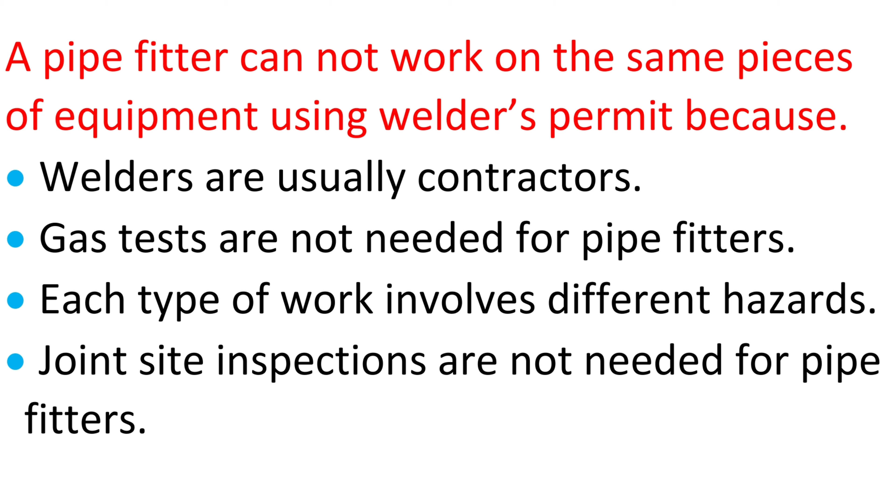Question. If a work permit is not issued during an emergency, what must be done to do the work? The superintendent must approve, all safety precautions must be taken, wear all PPE, and conduct a joint site inspection.

Question. The receiver must stop work if: he cannot find the issuer, the work site becomes unsafe, the issuer leaves the job site, or the designated representative must leave.

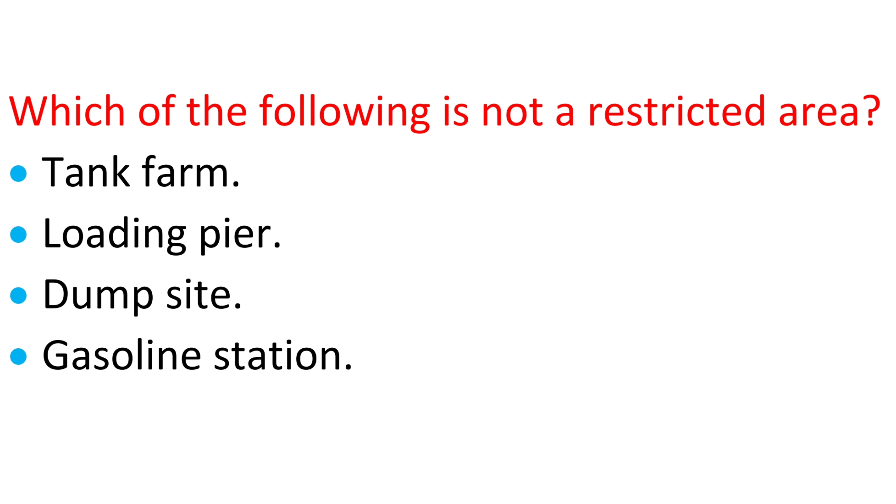Question. Which of the following is not a restricted area? Tank farm, loading pier, dump site, gasoline station.

Question. What do you call an area where work permits are required? Restricted area, sensitive area, controlled area, dangerous area.

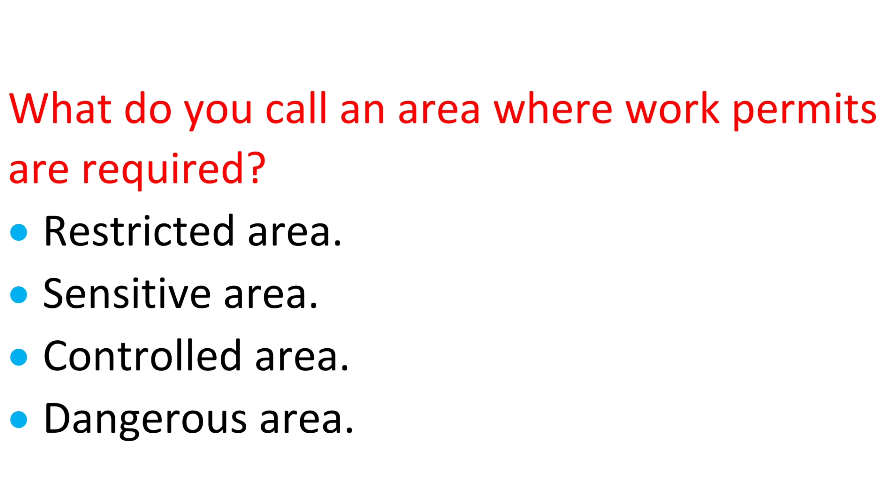Question. Who must sign a permit issued for up to 30 days? Receiver and designated representative, operations and maintenance division heads, designated representative, operations foreman, or issuer and receiver.

Question. Why is the checklist section important to issuer and receiver? It tells them all precautions to take, it makes sure important steps have been taken, it defines the duration and scope of work, or it controls the receiver's break time.

Question. Which work permit requires sewer to be covered within 75 feet? Entry, cold, hot, or release.

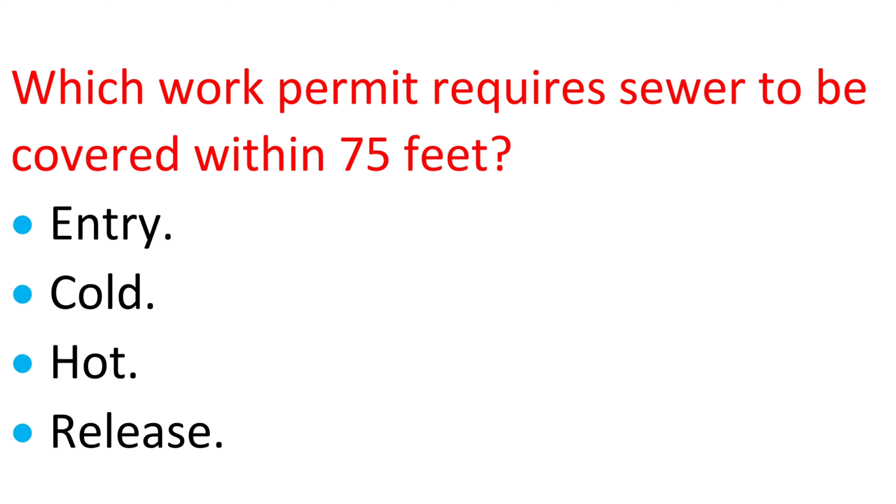Question. Who is responsible for safety at the work site after a permit has been extended? The original issuer and receiver, the person who countersigned the permit, the one who originally did the joint site inspection, or the issuer and receiver who signed the extension.

Question. What happens if work must continue past the time the original permit was to expire? Extend the permit or issue a new one, work can continue until the job is completed, stop work and come back the next day, or keep working but tell the issuer.

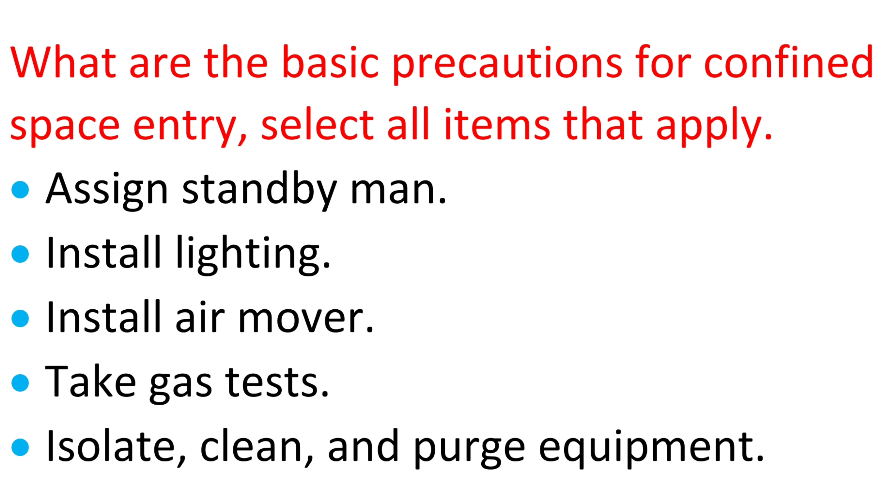Question. What are the basic precautions for confined space entry? Select all items that apply: assign standby man, install lighting, install air mover, take gas tests, isolate, clean, and purge equipment.

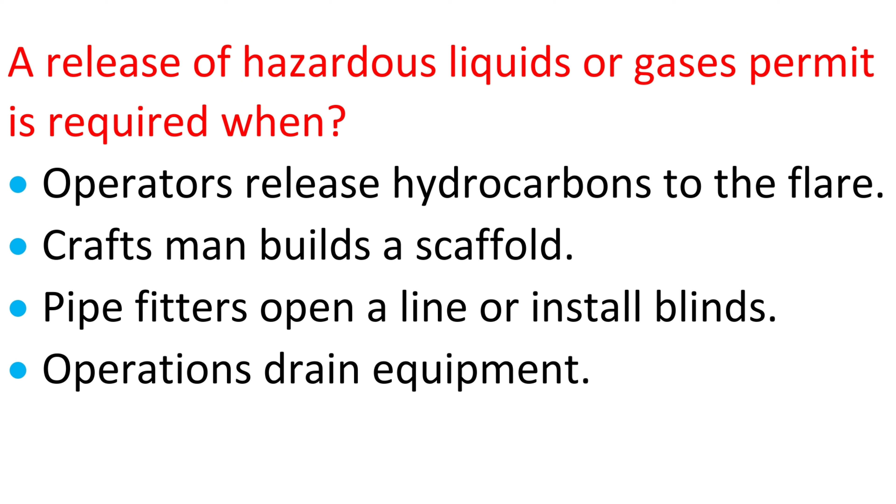Question. A release of hazardous liquids or gases permit is required when: operators release hydrocarbons to the flare, craftsman builds a scaffold, pipe fitters open a line or install blinds, or operations drain equipment.

Question. What hazard would you find when doing hot work? Auto ignition temperature, ignition source, ignition switch, ignition point.

Question. We use work permits in hazardous areas to identify: expired permit, alternate representative, the designated representative, or hazards and precautions.

Question. The use of a vehicle in an operating area requires which work permit? Entry, hot, cold, release.

Question. What are the basic precautions for cold work? Select all items that apply: gas test, PPE, special work precautions, standby man, fire watch.

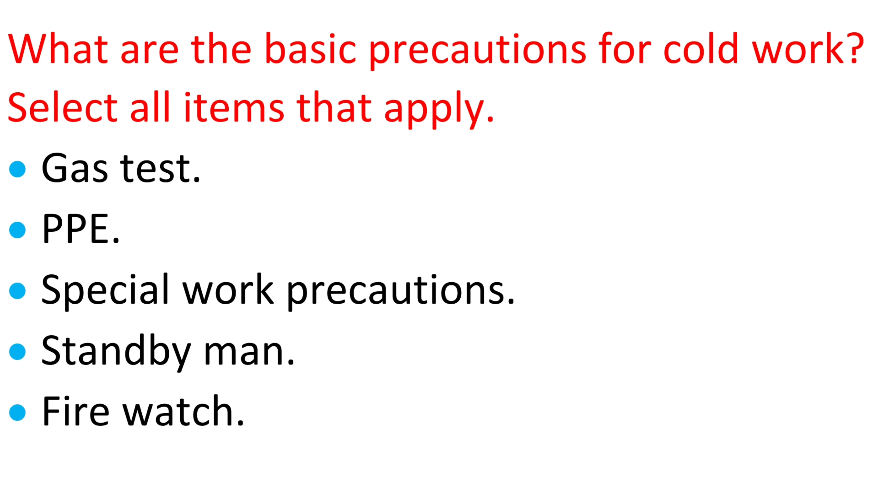Question. What is oxygen deficiency? A lower than normal amount of oxygen, higher than normal amount of oxygen, less than 23.5% oxygen, or oxygen that is above its flash point.

Question. What are the basic precautions for a hot work permit? Select all items that apply: blind, isolate, clean, and purge equipment, fire watch, fire protection equipment, cover sewer drains, gas test.

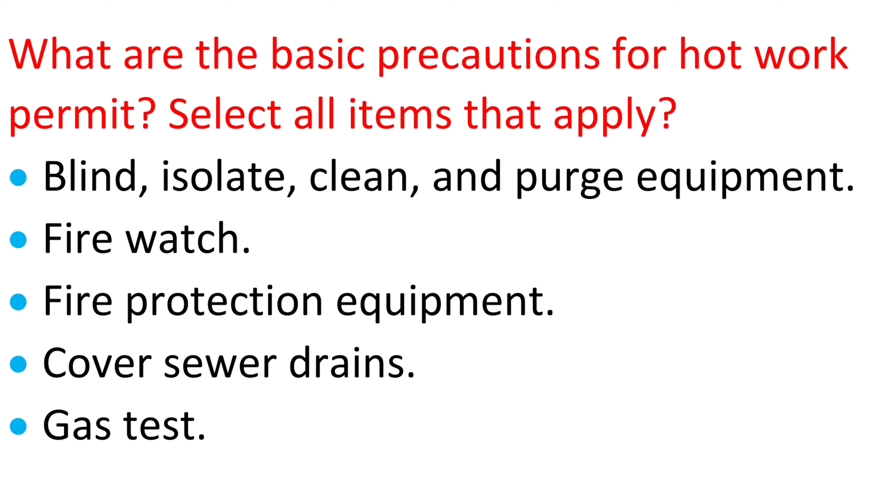Question. What is the acceptable level of LEL to allow hot work? 10 to 100 ppm, 0.0 ppm, 5% to 50%, or 21% to 23.5%.

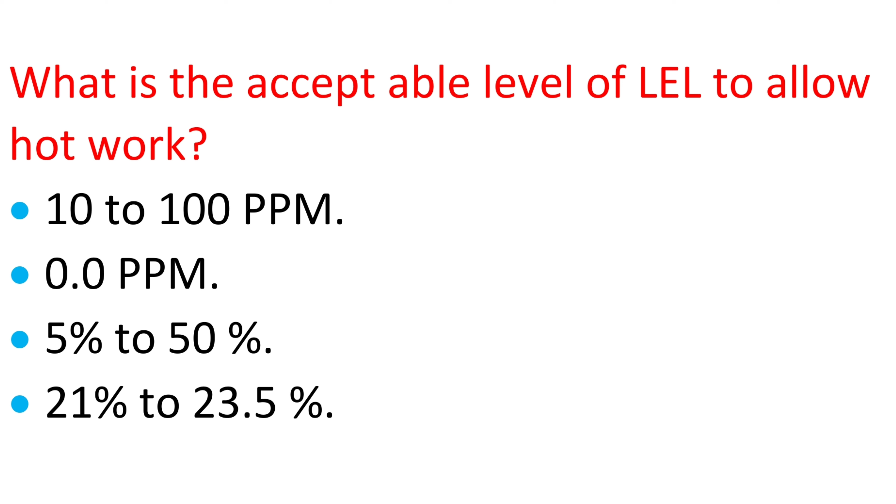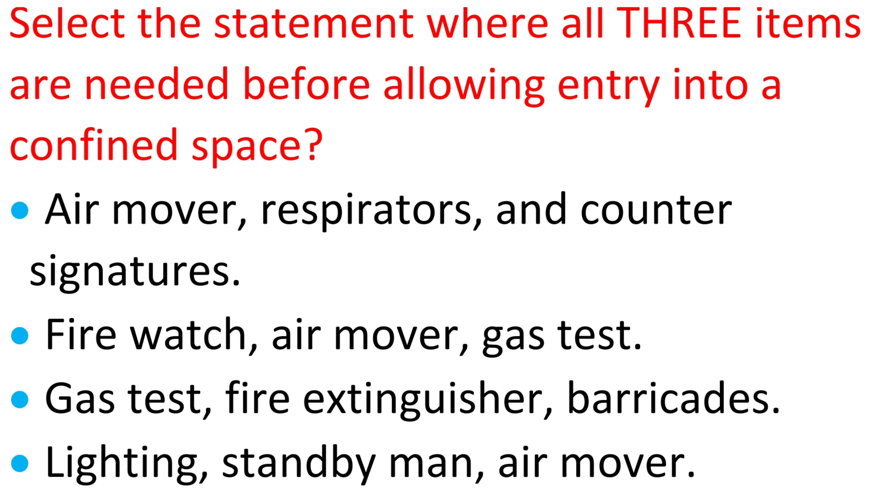Question. Who should keep the work permit? The standby man, the issuer, the receiver, or the fire watches.

Question. What should be assigned when working near combustible materials? Standby man, fire watch, firemen, flagman.

Question. What training should a fire watch have? Operate heavy equipment, operate control room, operate fire equipment, operate radio equipment.

Question. Who should ask for a work permit before they start working? The standby man, the receiver, the fire watches, the issuer.

Question. Who should point out all hazards and write on the work permit? The issuer, the standby man, the fire watches, the receiver.

Question. Who is responsible for the safety on the work site? The receiver, the issuer, both issuer and receiver, or both fire watch and the standby man.

Question. What is the purpose of the joint site inspection? To check the availability of equipment and manpower, to see the work plan and its implementation, or to discuss the scope of work and identify any hazards or risks.

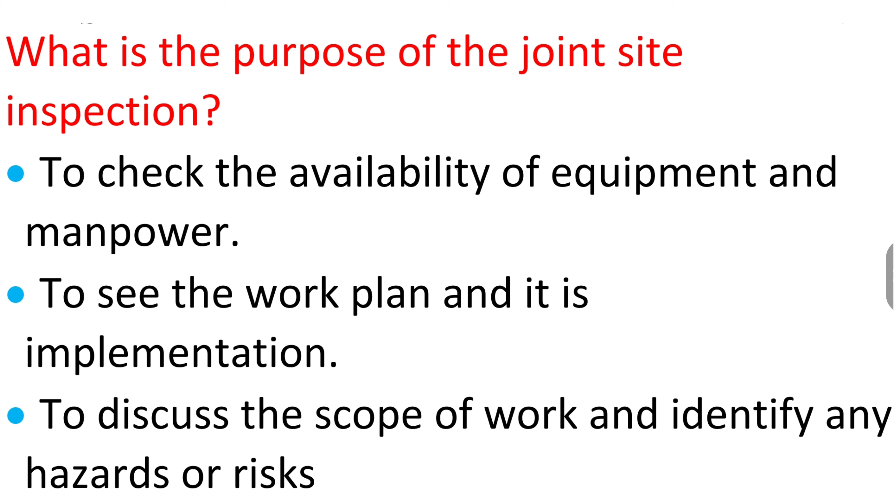What must be checked during the joint site inspection? Select all items that apply: safety devices, equipment condition, gas test, attendance report.

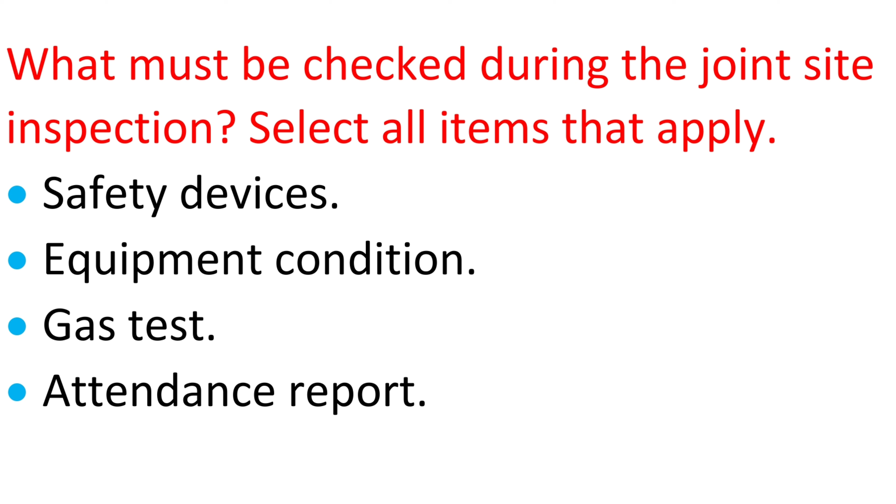Who decides whether an area should be restricted or not? The department manager, the superintendent, the issuer, the receiver.

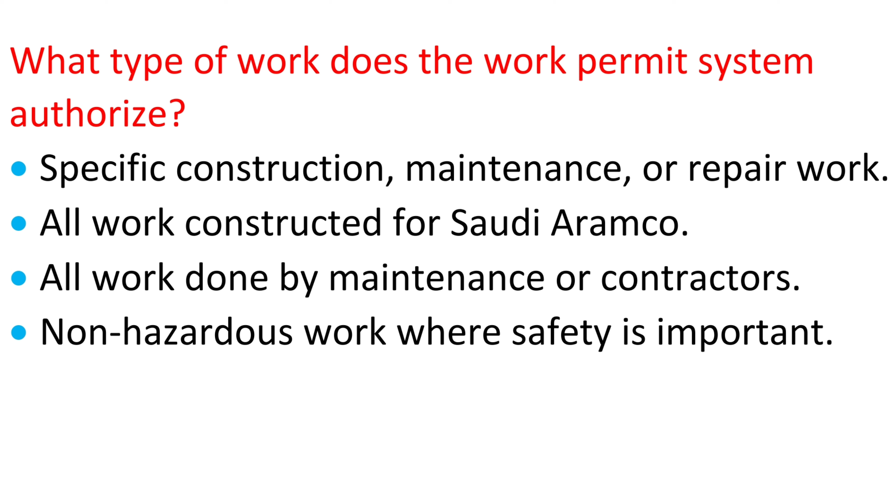What type of work does the work permit system authorize? Specific construction, maintenance, or repair work? All work constructed for Saudi Aramco, all work done by maintenance or contractors, non-hazardous work where safety is important.

Who is a receiver of a work permit? A qualified Saudi Aramco employee, a person certified to receive permits, a person nominated by his supervisor, a maintenance or contract worker.

The safety of the work site is the sole responsibility of an issuer. True or false?

What responsibility do issuers and receivers share when signing a work permit? Responding to emergency events, monitoring the operation of process, maintaining safety conditions at the site, getting counter signatures from superintendent.

Restricted areas include which locations? Gas plants, tank farms, and assembly areas; pump stations, tank farms, and gas well; dining halls, housing units, and operating area; welding shops, pump stations, an assembly area.

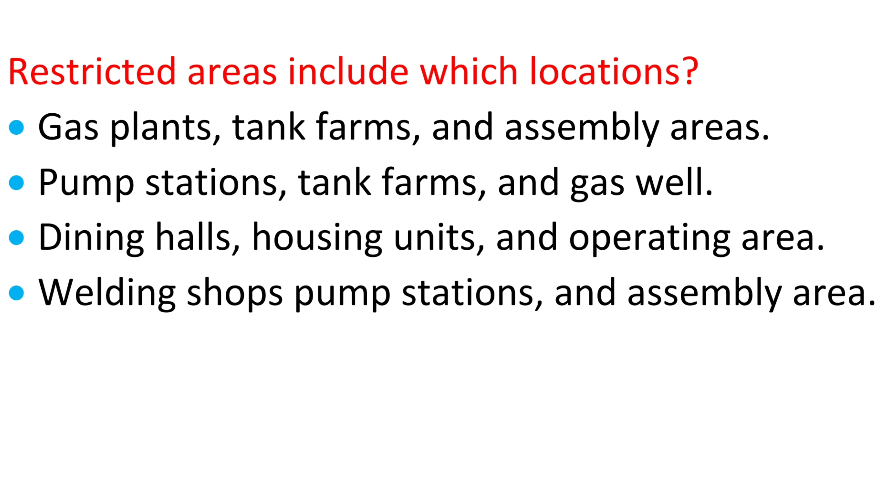Who can decide that work is low risk and that a work permit is not needed? The superintendent, the receiver, the department manager, the issuer.

What must the receiver do if he stops work? Tell the senior craftsman, tell the designated representative, tell the issuer, tell his immediate supervisor.

A work permit can be issued for up to 30 days if the work site is far away, only cold work will be done, it is highly unlikely that conditions will change, or the receiver cannot close the work permit.

Who must sign a work permit to extend it? Superintendent's counter-signature is required, the new issuer, receiver, and gas tester; the new issuer and receiver; the new area foreman and the new issuer.

Use a fire blanket or hand dig only are examples of what? Additional precaution, hazards, precautionary hazards, regular precaution.

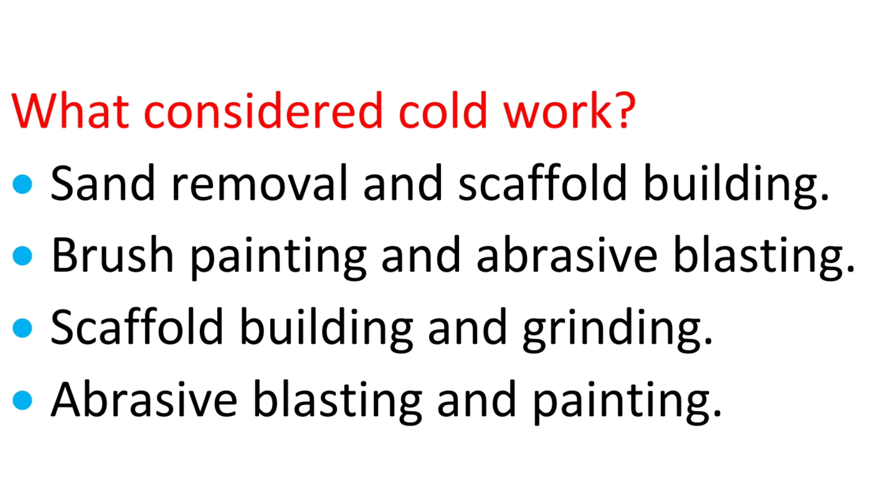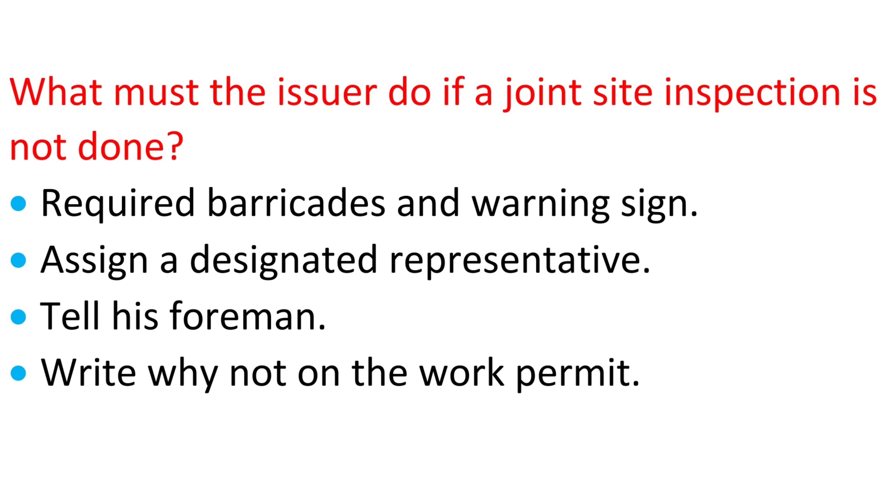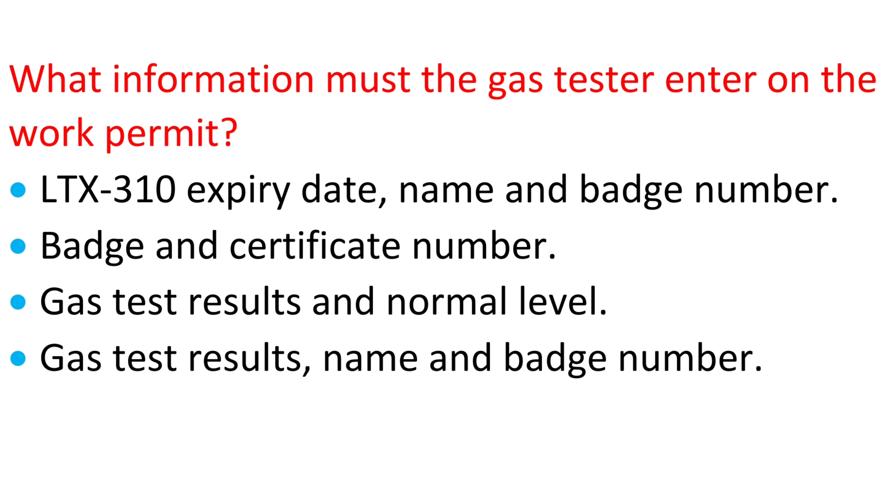Any worker can be assigned as a standby man. True or false?

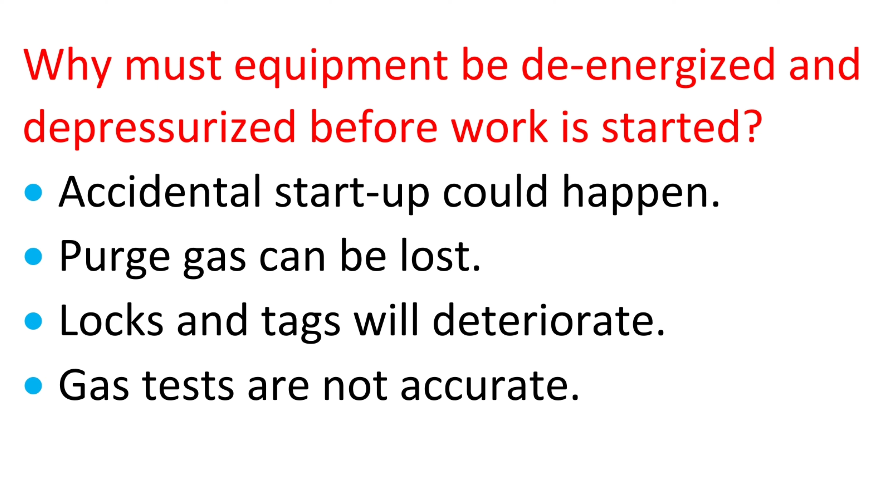Who installs locks and tags first? Security, power distribution, electrical engineer, operations.

Installing locks and tags on electrical breakers prevents accidental: blind installation, startup of equipment, nitrogen release, purging of equipment.

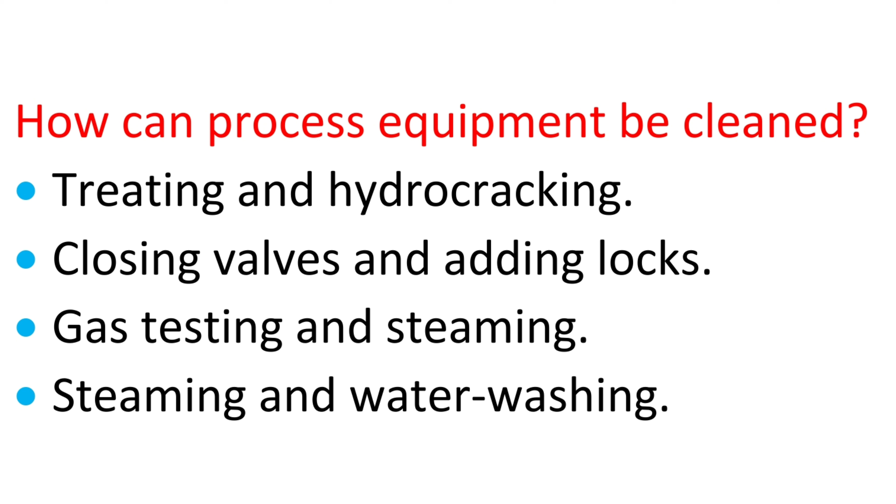How can process equipment be cleaned? Treating and hydrocracking, closing valves and adding locks, gas testing and steaming, steaming and water washing.

Who installs receiver's locks? One member from each work crew, the engineer and receiver, the issuer and gas tester, every member of the work crew.

We isolate equipment to make sure it cannot be shut down on purpose, shut down by accident, taken to a shop for repairs, started up, leak, or cause electrical shock.

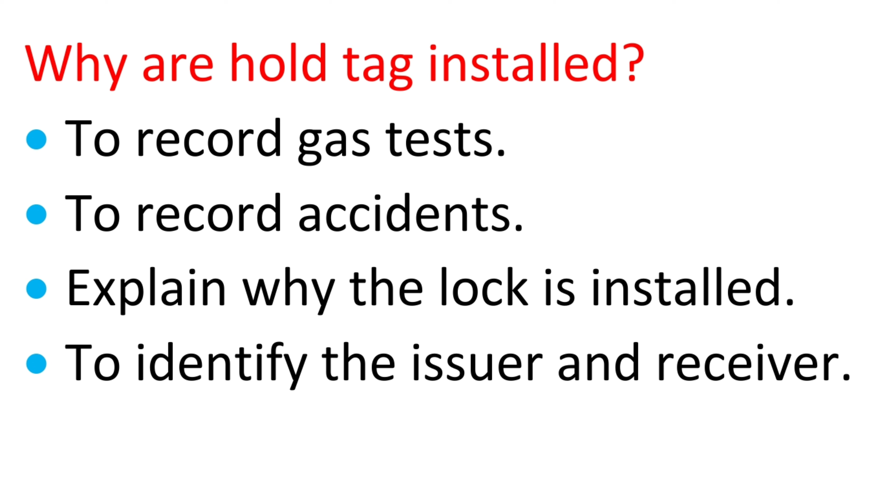Why are hold tags installed? To record gas tests, to record accidents, to explain why the lock is installed, to identify the issuer and receiver.

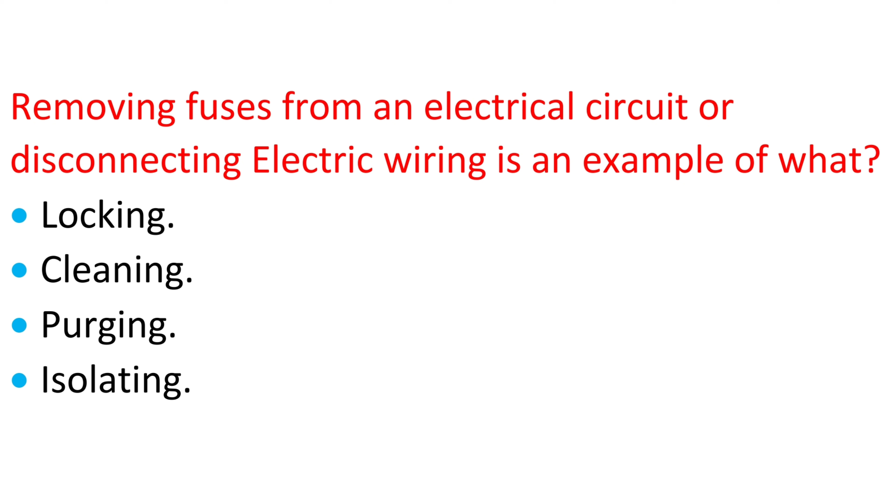Removing fuses from an electrical circuit or disconnecting electric wiring is an example of what? Locking, cleaning, purging, isolating.